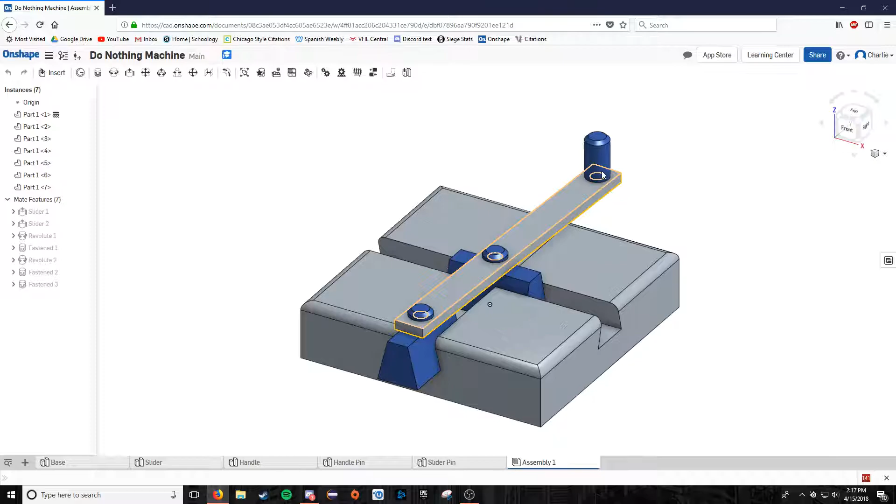So in the first reflection, I talked about my do nothing machine. This was from a tutorial, and I'm just going to go through this and show a really quick thing of what this does. So it really is just this simple, it spins around in a circle. You can see my mouse is tracing around. What I did there is I just click this, and then I can make it move. And that's really it.

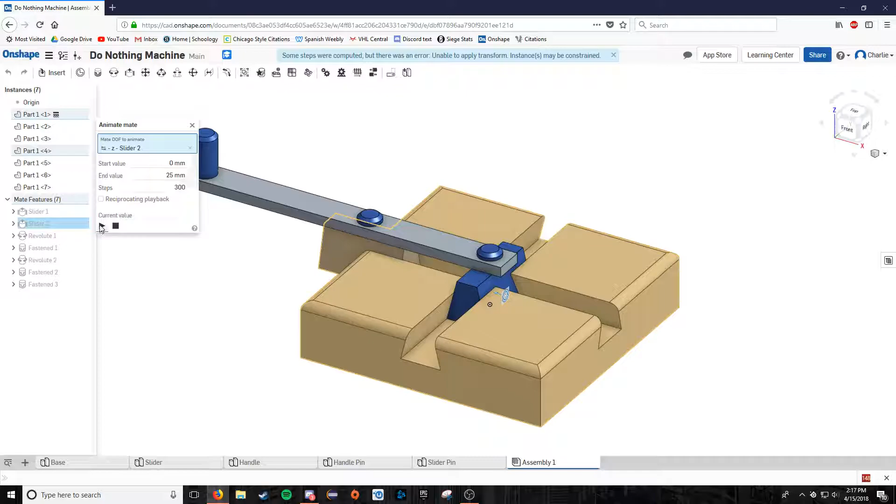And so this taught me obviously a lot of things. This was the basics of a lot of the things that I know how to do now. So I now know how to animate and do all kinds of things related to just the most simple of parts. And that's what I was talking about in my first reflection, is I know how to make a block like this and cut this shape hole out of it. That's important, and all sorts of stuff like that. So this is just the very simple, the most base general understanding of how these concepts work in general, and that was very helpful for me in my learning process.

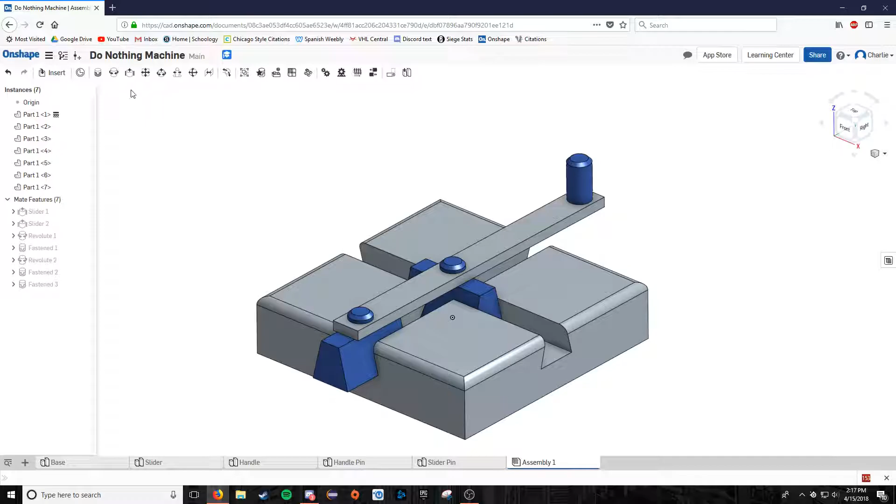So that led on to more complicated things like the butterfly knife, which I talked about in a different experience. If you have not looked at the model that I uploaded on that reflection, I believe I uploaded a model of this.

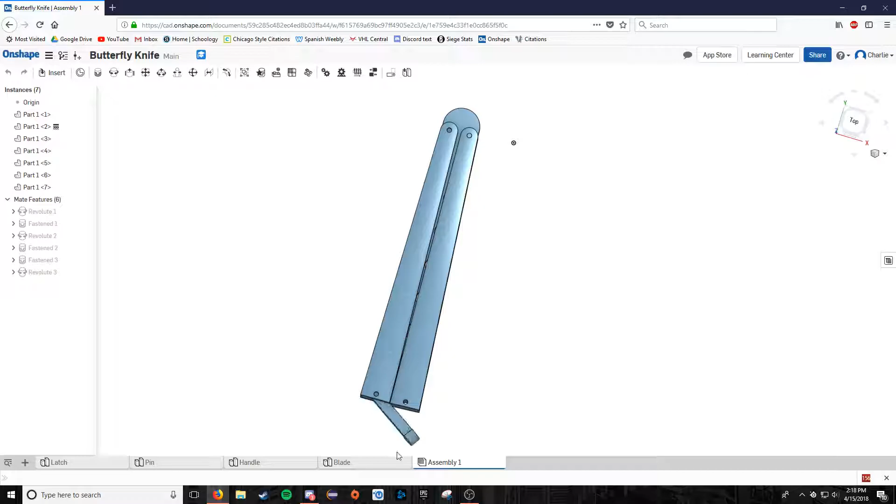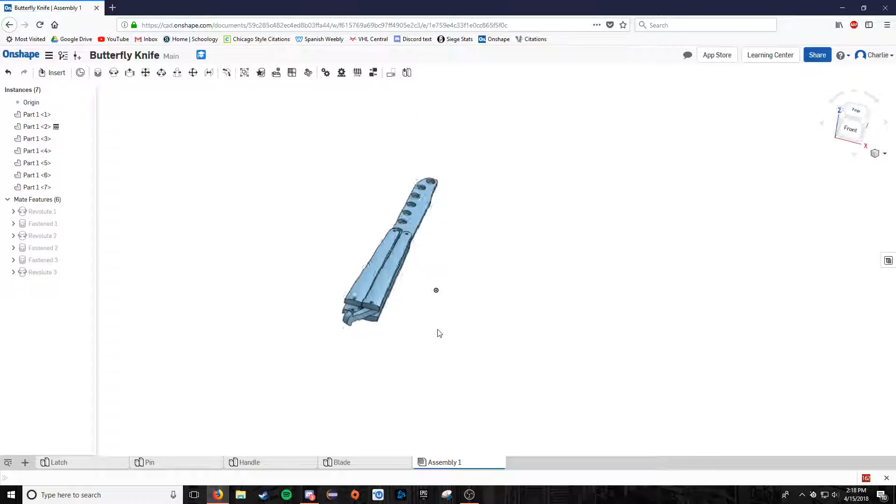Here it is. So I have this pin here, which is on a real knife, just keeps it closed. And then this is where I was experimenting. I'm all in assemblies right now. I have my individual parts that are all visible here. But I can kind of see how it's going to work, and this is sort of experimenting with the mate feature, and that was a really important thing for me, to experiment with that and see what I could do with it. So being able to make this move the way it did and stop there, I couldn't move it any further. That was a big milestone for me in this process.

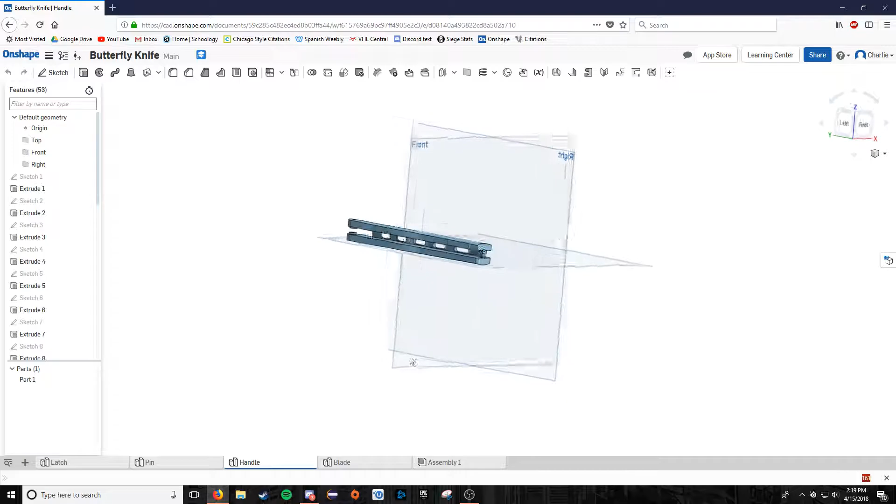So it looks a little odd sometimes when it opens, it kind of jerks, but it does get the process across. And really working out how to do everything on this handle, that was probably one of the biggest successes I've had in learning CAD initially, because you get all these curves here, and then it's also sort of triangular, just a little bit, and it's just a lot of different shapes that are not easy to make immediately.

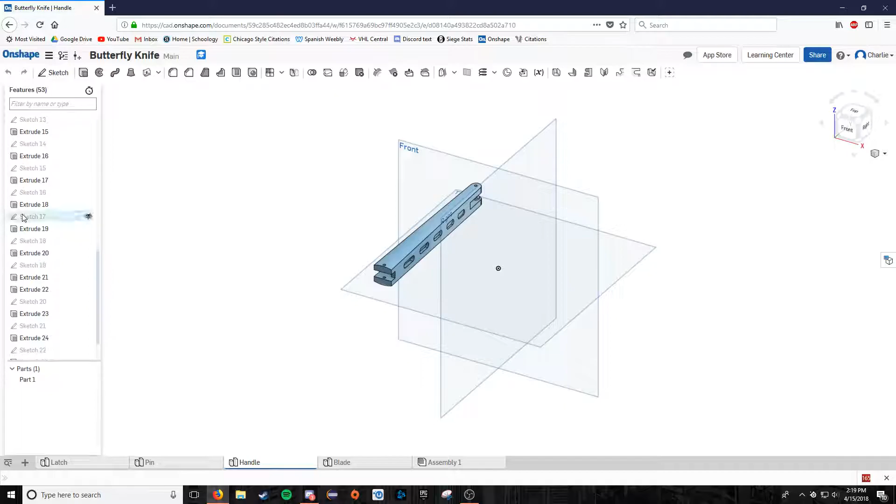So that was my second project, and as I talked about in just this reflection, I did have a bit of a problem here with how many sketches and then extrusions I made. And this is not fixed on this one, but in the case of something like the power cable bracket, which is the project that I worked on for the past week or so, I originally, when I made my first one, had a lot of sketches here. And that was not something that my robotics mentor Steve liked.

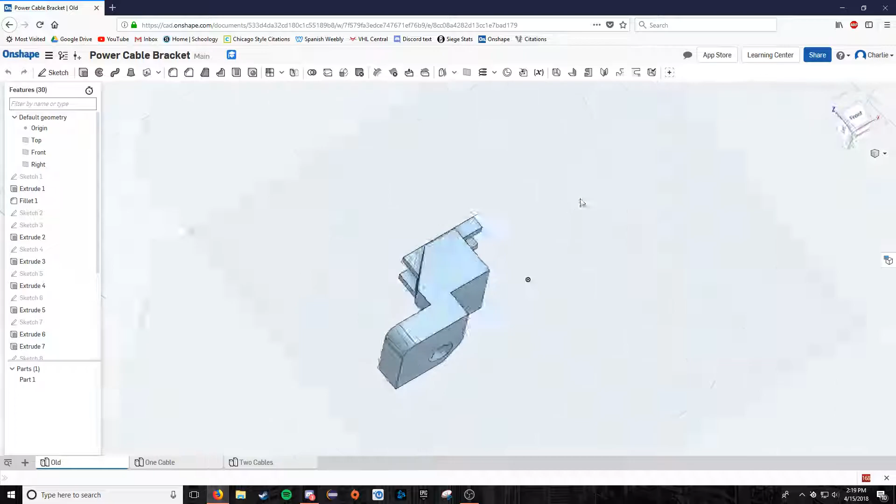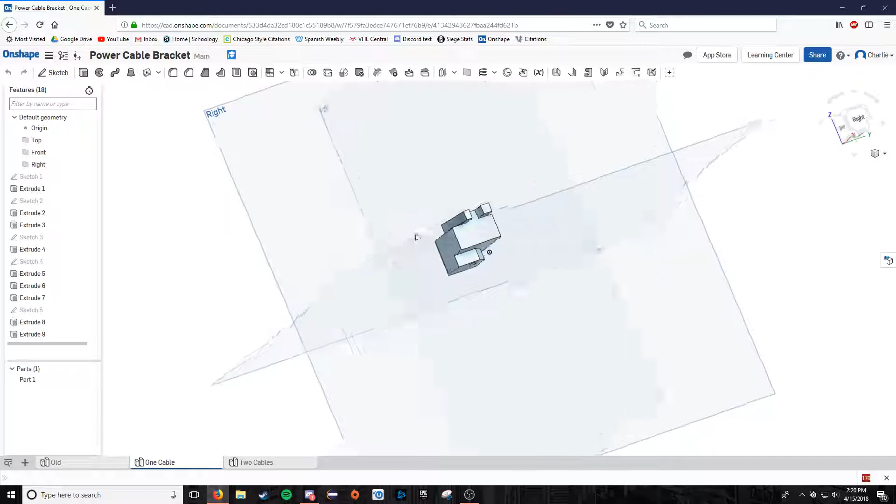And so through his advice, I've changed up my design significantly to make this sort of central hole, and I can show the section view here, which is a special mode. So you can see the hole gets thinner there. This feature is something I did not know about, and I learned it from him, from Steve. He helped me learn that.

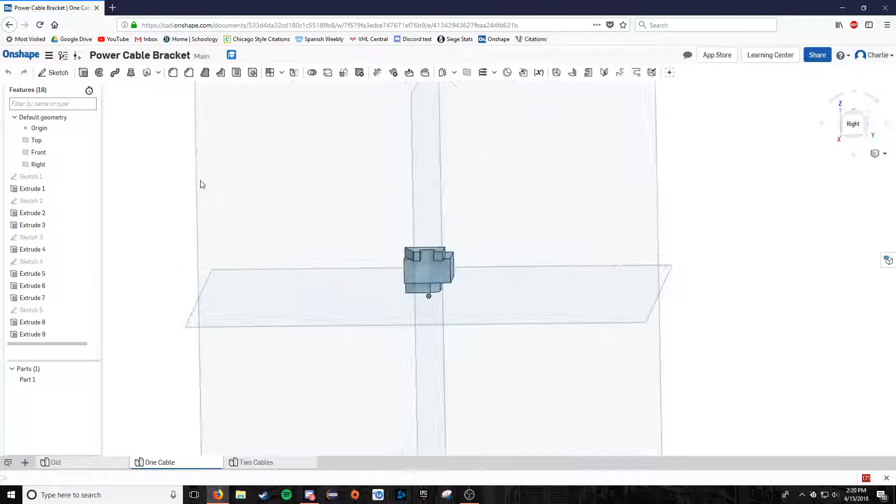So this ongoing work has been done in order to build a piece for robotics, and that piece is now functional and is about to be installed on the robot. So that was very exciting, to finally get something that's going to be used.

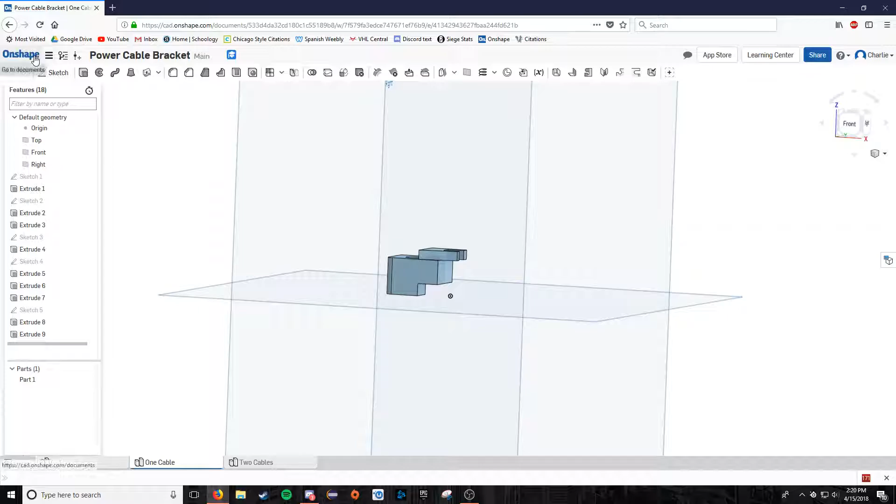The last thing, and this one I'll talk about in my next reflection—I'm finishing it a little early and doing the reflection a little bit late. This is going to be a future project, related to an arm on our robot that's going to use this extrusion material to slide along each other and then have pulleys in here.

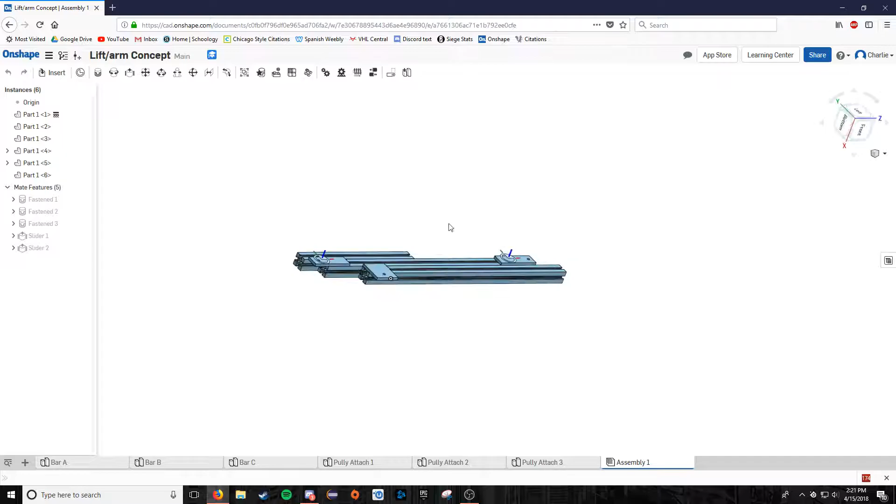So what I've done is I've learned how to connect pieces in special ways, and then at the same time, like I did on the butterfly knife, I've learned how to get things to carry each other. So I can get this arm to sort of telescope like this. And that was a huge success in my process here.

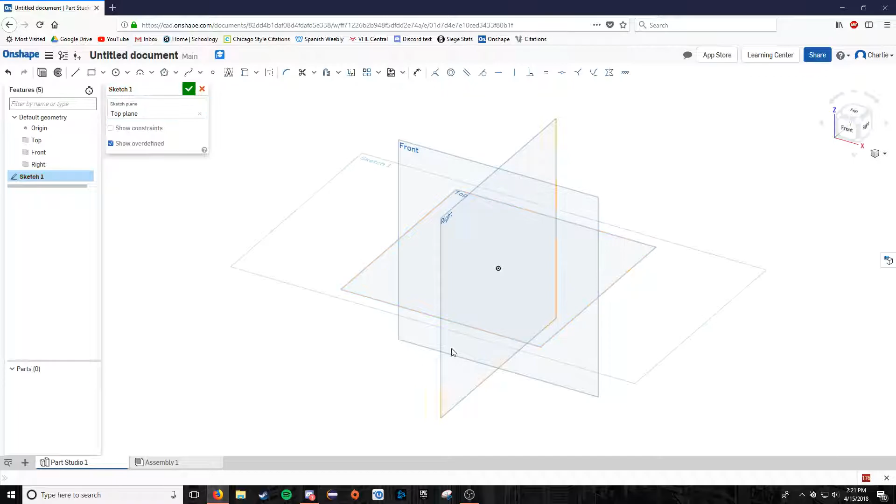So those are the biggest of the projects I've made, but really the things that I've learned through all this are just how to run this system in the simplest of ways. So when I started, I would have no idea how to do what I'm about to do right now. I'm just flying through these steps, and I can make well, really whatever I want pretty quickly.

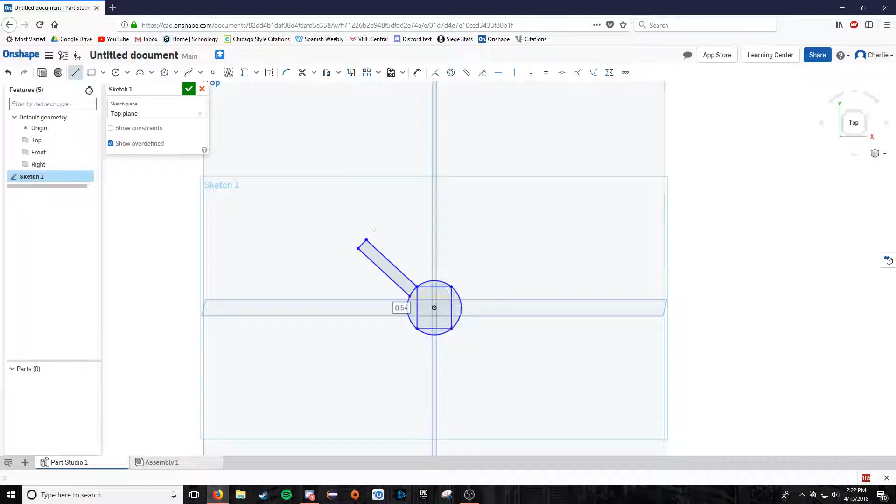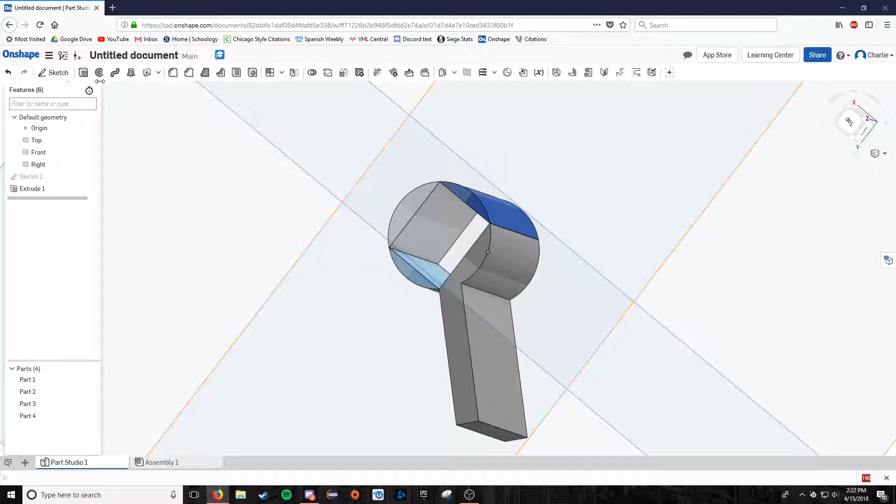And from there, I can make it work into a way that I want it to work, which is a huge benefit for me. That's something I didn't really expect I'd be able to do so quickly. So being able to sort of sketch this stuff—this doesn't really do anything for me—but then as soon as I want, I can extrude this and that, or maybe not this one, and I can just do this sort of thing. I don't know what this would do for me. It's just the fact that I can make that is evidence of my continued growth and ability in this CAS experience.

So that is the overview of my current CAD knowledge, and I'm hoping to do more than one of these videos so that I can track my progress as I'm going through. So hopefully that was informative, given that I know not everybody can really understand how to run through a CAD project, and it's a little bit slow for just reviewing evidence.